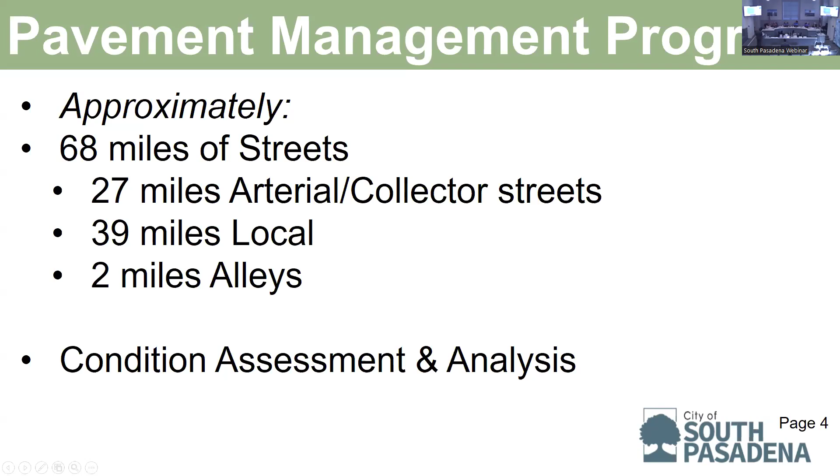Okay, let me jump to the next slide here. So this is really quickly just going through what we already showed you in previous meetings. These are the types of things our survey team went and took a look at. We basically had a sample set of every single street in the city. We had a team of surveyors following ASTM standards, looking at various conditions, and they have a metric to identify the severity and extent of these problems, then compile those to develop a grading structure for the entire street network.

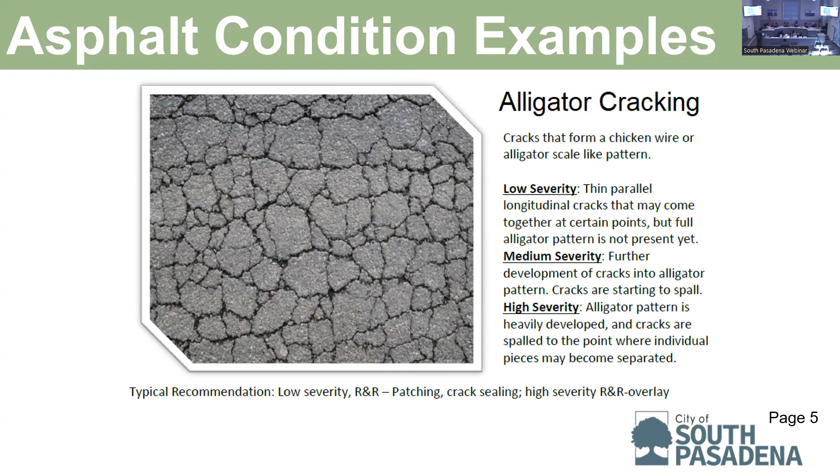So the types of issues they're looking for include things like alligator cracking, depressions, block cracking, potholes, obviously a very popular one here. You can see that the way they grade these potholes is by the diameter and the depth, and so the severity of a particular pothole can be rated, and that goes into the condition grading system.

Ted, I noticed you had some issues of subsidence of some of the streets. Is that also working on trying to fix whatever situation with the water that's causing the subsidence underneath? Yeah, that's correct. When it's related to a utility, we usually have some other indicator that lets us know that's a problem. If it's a sewer that's collapsed, we'll see the impacts of that, or a water break or things like that. A lot of times these are related to, say, a former water break that was repaired, but in our urgency to repair the water break, we weren't necessarily able to rebuild the foundation of the street. So the subsidence might be related to a previous utility issue. Yes, and that's why it's important, as you mentioned, as we do fix the streets, to actually fix the underground utility infrastructure at the same time.

Great, I'm glad to hear it wasn't a recent issue. Yeah, I mean, we have had some recent issues, but everything is patched up and still operating as of today.

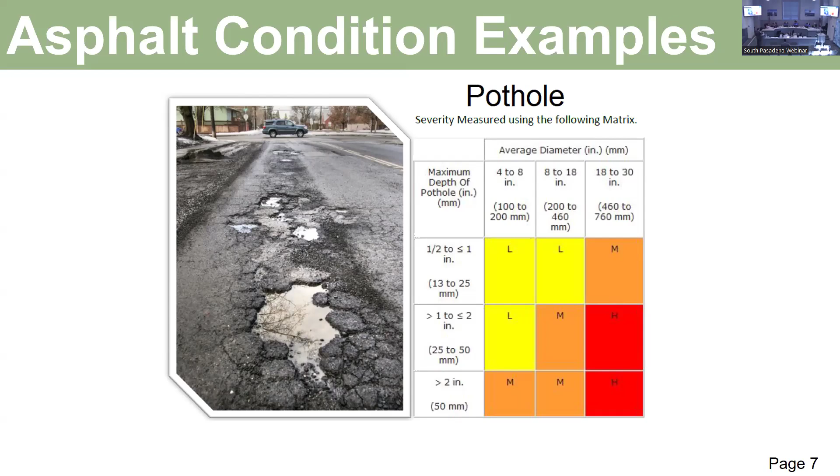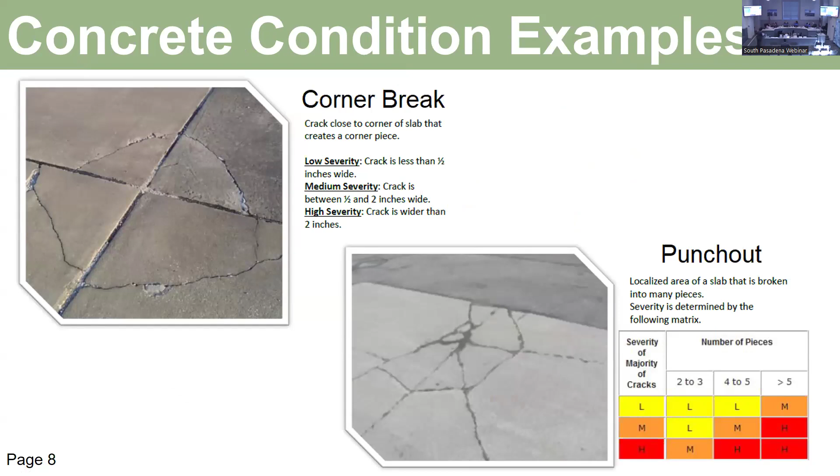So the majority of the surface of the streets in the city are asphalt, but we do have some concrete streets, and we'll talk about that in a little bit too. There's a separate set of condition factors we need to look at for concrete streets, basically looking at things like corner breaks, punch outs, divided slabs, spalling on the concrete, and these all factor into the condition rating system as well.

Ted, quick question. If tree roots are causing, let's say, lumps in a street, which of these categories would it fall under? It depends on what the condition is. A lot of the time it's creating some sort of cracking on the street because the tree roots are pushing up the asphalt. Sometimes we'll see if the tree roots are impacting the concrete curb and gutter. They don't necessarily have a grading for that because it's not the pavement, but that'll cause some sort of underlying issue that impacts the pavement itself. So it just depends on what the observed impact of the tree roots is. Okay, yeah, there isn't a tree root category—it's more like what happened to the asphalt condition as a result of the tree root.

That was one of the things I was thinking about when reviewing this—I'm thinking of a couple of streets in particular where the roots of the tree are creating ripples. In those cases where it's not split, right, the asphalt hasn't split, you're going to have a substandard driving condition, but neither of these metrics would specifically hit that because it's not open. Sure, so Glendon Way is a good example of this where the tree roots on that street—when we get a little further, you'll see the conditions get divided into a couple different categories. One category is based on loading, so repeated cyclic loading and impact from vehicles passing over it. That wouldn't be the tree root issue; it would probably fall into either a climate type of condition or some other type of condition. But yeah, it is factored in, it's just not specific to tree roots.

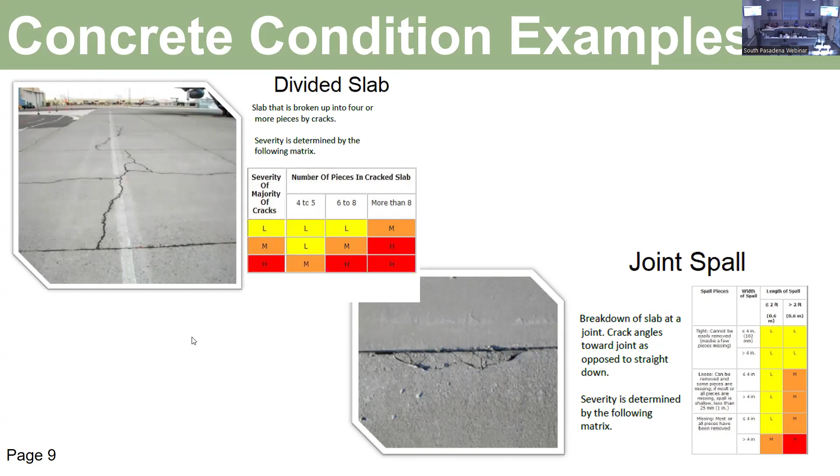And so this will probably jump right into that concept here. There isn't an obvious direct correlation between, say, a particular severity of a pothole, a size and dimension of a pothole, and a particular grading. In our previous discussions, we talked about our grading system, which goes from 0 to 100, 0 being the worst and 100 being the best.

The consultant that we use to do the surveying has a particular algorithm where they input the types of distresses, and the frequency and severity of them. They come up with 3 different PCIs, pavement condition indexes - one based on climate, one based on loading, and then kind of an other. They take those 3 factors and come up with an aggregate score, and that's what we're going to show you as the overall PCI.

But someone might ask, well, what score do I get if I have a pothole this big? It really depends on a number of other factors, so it's hard to determine that unless you go through the whole modeling process that our consultant went through. Hopefully that makes somewhat sense.

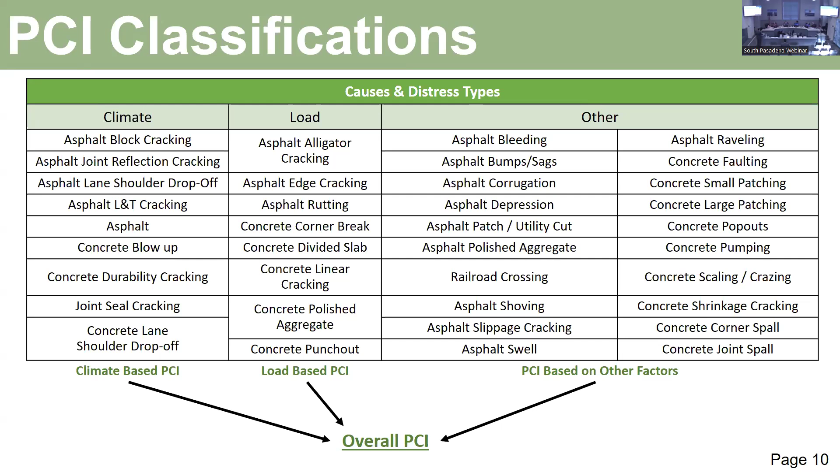So not too much different from this 2023 evaluation that we did. You can jump to the next slide, Raina.

Actually, before we do that - this was the 2020 map. If you look at the legend on the upper right, you can see the blue streets are in the best condition, mostly from newer, more recently done projects. For example, that middle section of Monterey Road that was recently paved a few years back is in blue. The orange section of Monterey Road on the very far west of the city was orange, in poor condition - that's the one we just recently repaved earlier this year. So this correlates to your experience driving on these streets. But the one thing to take away is that the red, very poor, is spread out throughout the city. There's no one region that's immune to poor streets.

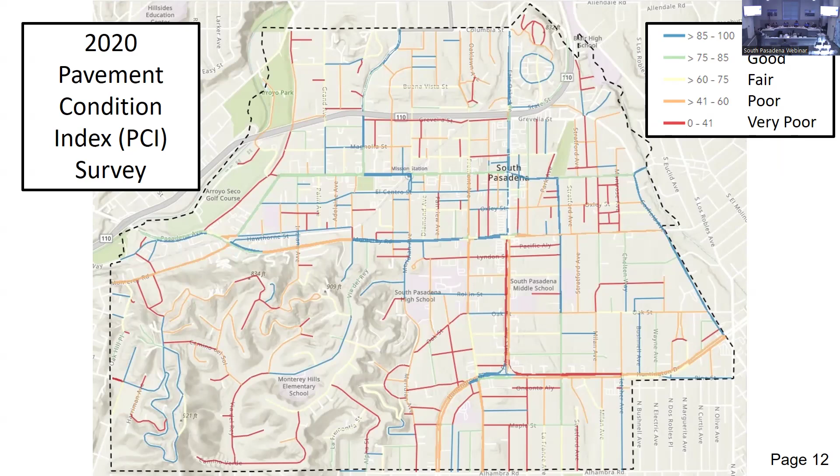Thanks, Raina. So let's take a look at the numbers from the 2023 evaluation. Next slide, Raina. Thank you. Sorry to make you jump around there.

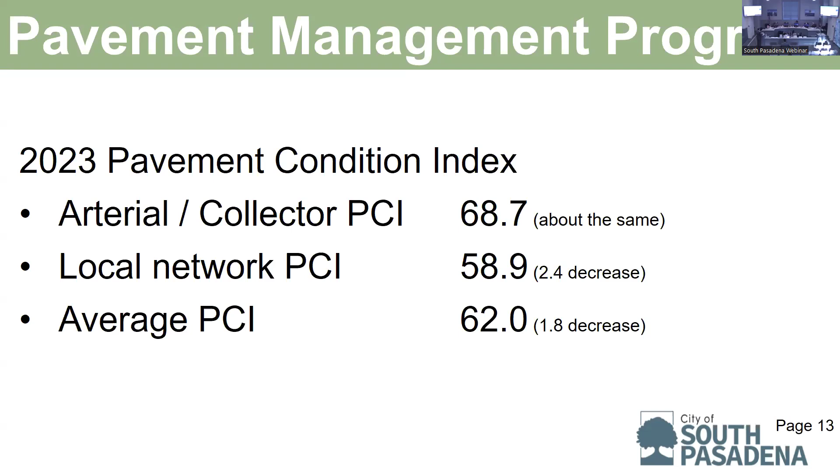You can see the numbers are pretty much the same - we have a small decrease. The local network, that's actually a typo, it should say 56.5, so it did go down 2.4. The average went down about 1.8. But again, this is all very high level. A 0.1, 0.5, even a whole point difference is kind of subjective because it's based on surveyors going out, identifying all these types of distresses, and then that all getting aggregated into this algorithm model. So there's not really a huge difference between the couple years. You wouldn't see it go up, but you don't see a huge decrease either, which is a good thing in most cases. Let's jump to the next slide.

And so this was the 2023 map. Again, red is pretty pervasive to the city, which explains our low aggregate index. There are some streets there that were since recently paved, so you have the remainder of Monterey. This survey actually ended at the end of 2023, so it didn't capture the new streets that were paved starting in January 2024. Okay, let's jump, Ted?

Yes, this survey was conducted in 2020, then you did one in 2023, and it looks like you did one in 2024 now. It was originally done - the last one on record is 2015, then it was done in 2020. Then we did the survey in 2023, but it took us the last 6 months to actually compile all the data, put all the information together, and get the maps together. I think we got the actual data around end of April 2024, but the measurement was done in 2023.

And that's important because, 6 months later now, the streets have continued to decay, so it doesn't exactly look like this anymore. Is that done by an outside vendor, or internally? Yes, we use an outside vendor, and all cities do this.

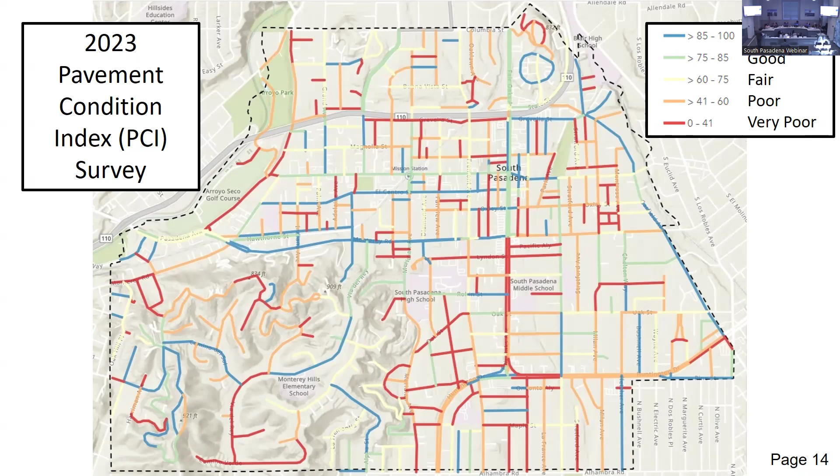Let me try it here. Perfect. Thank you. So this looks a little familiar to you.

This was the zone approach that we first introduced to you a few months back. The idea here, I'll repeat, was so that we could start a new maintenance program in the city in which we are maintaining streets on a zone basis, and we move away from the selection of picking streets all across the city.

Based on the previous map you saw, showing the severity and condition of streets, the same consultant would typically give a city a 5-year list. They'd pick the streets about to go bad and say you should maintain these before they get terrible, and pick the red streets and say you should rebuild these. That's kind of how our models worked over the years—those streets are sort of cherry-picked throughout the city. The zone approach we're proposing offers a lot of efficiency in terms of getting things done in an area versus hopping around.

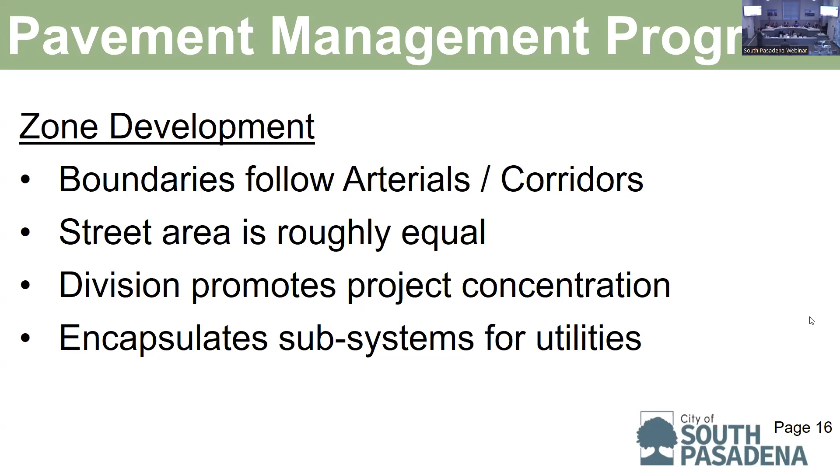If you're going to take anything away from this presentation, it doesn't really matter which area goes first in terms of the plan, because over time the idea is that you're maintaining streets in a given area in a given year. So people have some predictability in terms of when their streets are getting maintained, and the areas follow each other every year. In theory it should be like a 7-year program.

However, because of the dire condition of many of the streets, it'll take some time to get into this 7-year cycle program. So what we really want to do is address the worst areas first so that we can be more efficient and save some money. We'll talk about how that works in a moment.

But we did take a look at the PCI scores per zone. As I mentioned earlier, they're not too different—there's not a big difference between the orange zone and the pink zone, 57.2 and 57.9.

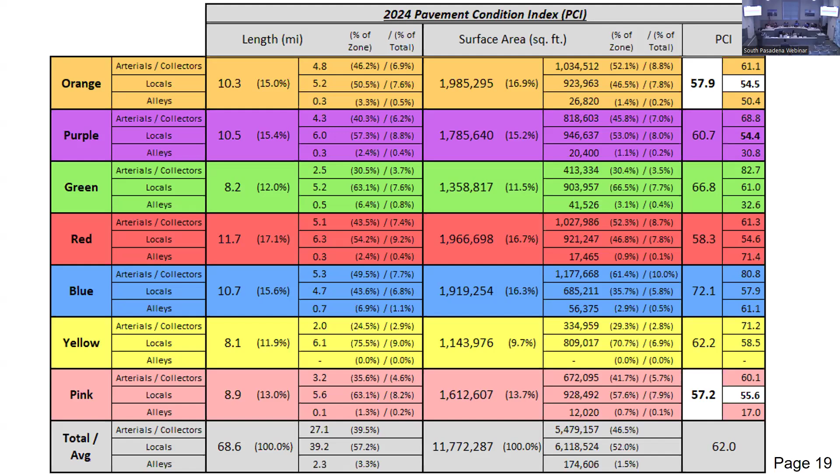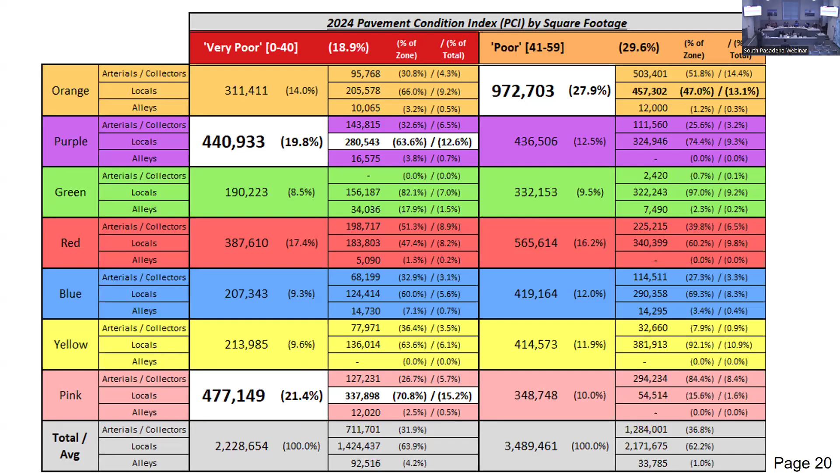So if we divide up the areas per the general condition, looking at the lowest types of condition here—at the top of the chart you'll see very poor and poor are the orange and red sections—we see again that the pink zone has the highest area of very poor condition, particularly in the local network, seconded by the purple area. Next up is orange with the largest area in the poor condition. Again, these are just high-level numbers to get a sense of the relative nature.

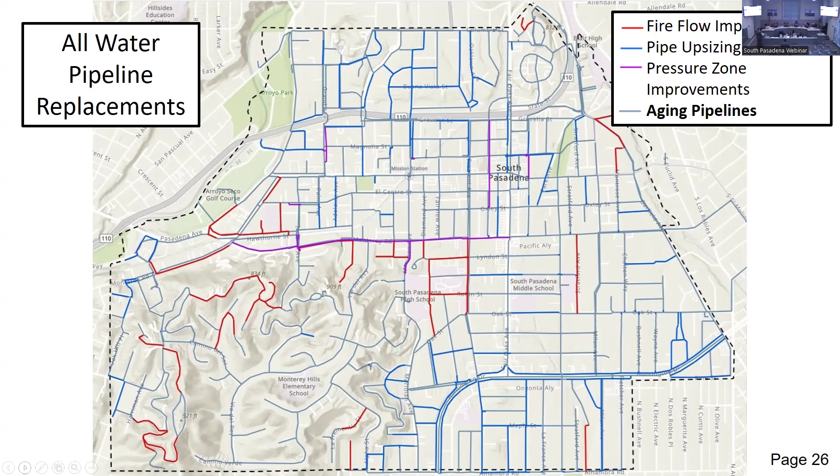So this is just one of the factors being considered. The sewer system is in a lot better shape because the majority of it has been lined. We do have issues with older manhole structures that need to be addressed, and we still have areas of the sewer system, mostly point repairs, that need to be excavated and replaced, some lining, and that would have to be coordinated with the street project as well.

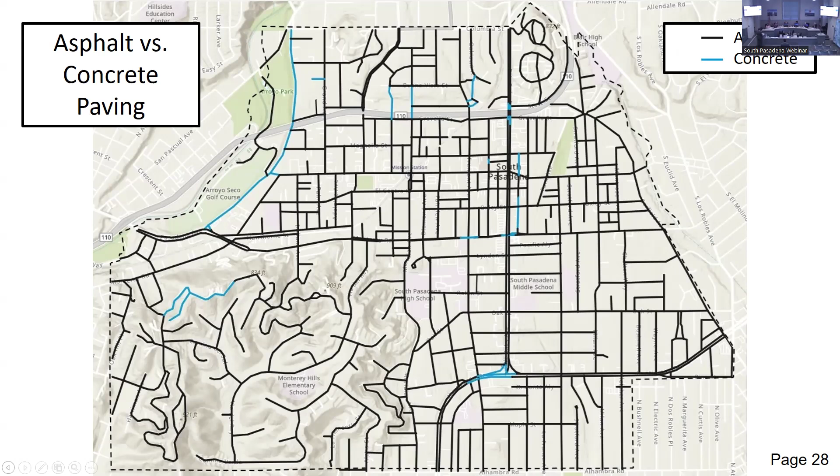Not necessarily, and that's a good point. For example, our proposal is that the intersection of Mission, Pasadena, and Arroyo, that little tiny section is currently concrete, and we would actually replace that with asphalt. That makes more sense for our needs. However, it could be very expensive to rip out a good mile of concrete to replace it with asphalt. It might make more economic sense to keep it and just repair it. It just depends on the circumstance, but it's a very good point.

So getting to the results of all this information, we utilized all this survey data and did quite an extensive analysis, both our team, our survey consultant, and then a separate streets program management consultant helping us prioritize where to focus our efforts on things that should be maintained now before they get into worse condition, where pavement has not yet failed, basically looking at every single street section of the entire 68 plus miles in the city and determining what we should do with it, then calculating the entire cost for that effort.

And that's what the council asked us to do. Many cities wouldn't go to this length—they would basically come up with a plan for the next 5 years and publish the list of what they're trying to accomplish. But we were requested to come up with a comprehensive plan for the entire city. Let's jump to the next slide.

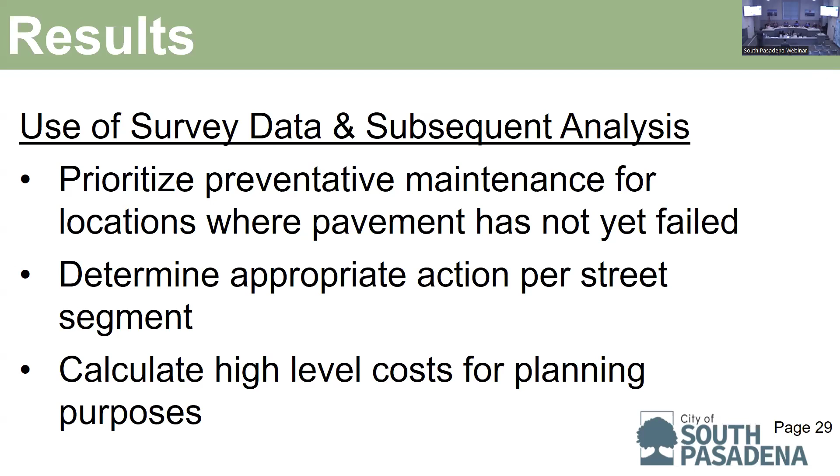Okay, so if you were to dive into the details of this, you would see from our consultant that they recommend all sorts of different things—different types of treatments and bonding, cape seals and slurry seals that they might recommend for preventive maintenance. For reconstruction, they would generally recommend that we grind off the top layer of the street and overlay a new layer, or we might have to replace the entire foundation of the street.

For your digestion and the council and the public—because this is really something we want to start providing information about regarding their street—we try to break it down into 2 categories. Either we need to reconstruct your street, which can be a grind and overlay or more in-depth construction, or we need to do preventative maintenance, which is simpler, faster, and keeps your street in decent condition until it has to be reconstructed. We tried to represent this on the next maps with blue meaning preventive maintenance, which we call treatment, and orange as reconstruction. In some maps you'll see orange as grind and overlay, and red as reconstruction. Generally we're talking about 2 categories: one cheaper and faster, one more costly and effortful. Let's jump to the next slide.

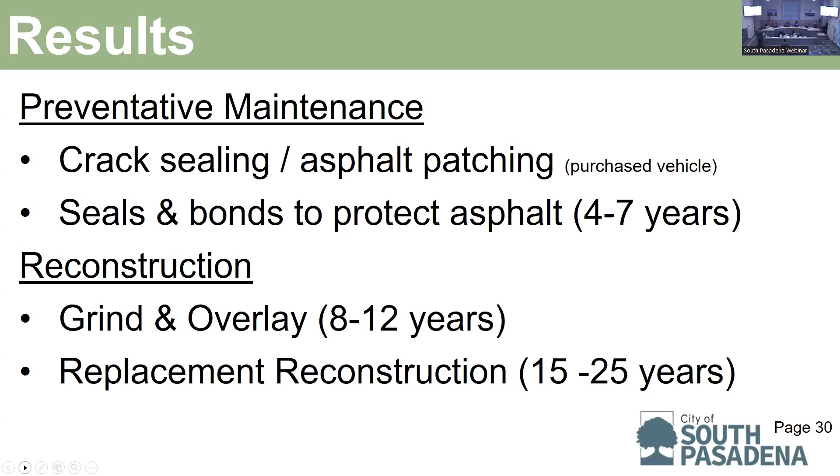So we did come up with a cost model for the whole thing. As I mentioned, our consultant looked at different methods for reconstruction, ranging from 65 cents a square foot up to almost $23 a square foot for concrete. We added costs on top of this for our staff administration and project management, anywhere between 7% to 30%, depending on the type of work needed and the type of street.

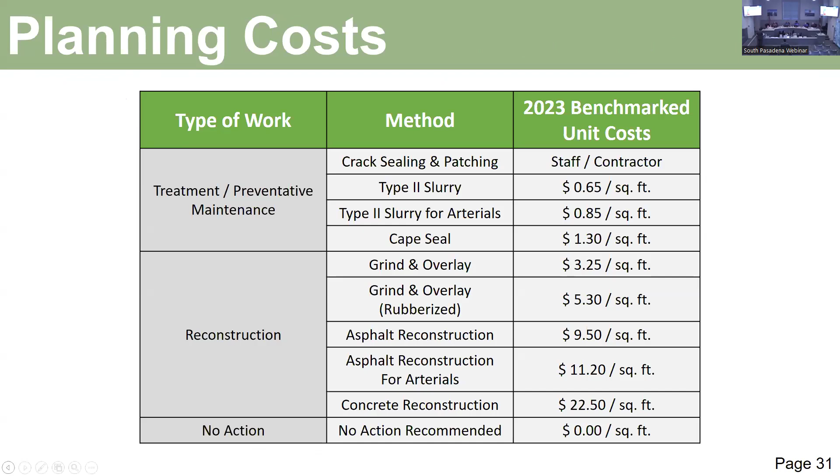So basically pulling all this information together, let's jump to the next slide. Well, before we get there, let me make one more comment. What we're trying to accomplish here is a long-term maintenance plan on the zone approach.

Ideally, if we get to a point where we've repaired streets and we're just maintaining them, our costs will go down quite substantially over time. This is a decay curve, used a lot in engineering for all types of applications, not just streets. A street that's in great condition, brand new, will stay in decent condition for most of its life, then towards the end of its life, it will drop off in quality very quickly.

So the idea here, cost-wise, is to catch those streets before they have that drop off. You can inject a little bit of money to keep that condition up versus paying a lot of money to rebuild it from the bottom up.

You can't do this forever. In fact, if you notice the nuance of those curves at the top, each cycle of an improvement drops a little further and a little further. So eventually you do have to rebuild a street, but the longer you can keep it in that up cycle, the less money it's going to cost you over time. That's kind of what we're trying to accomplish here.

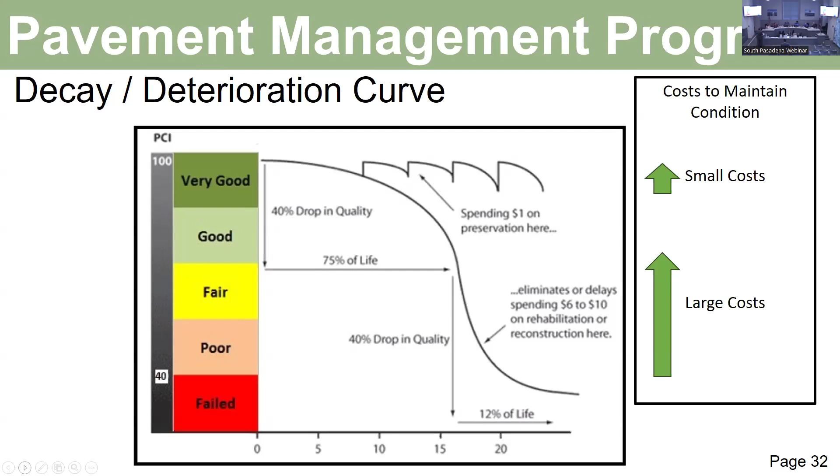So really it comes down to 2 parallel efforts: the blue areas, keeping them maintained and in good condition, and the orange areas, a little bit of red in there, rebuilding those and then getting them into a blue sort of maintenance cycle. Not to be confused with the color of the zones, we're using a lot of colors here, so please bear with us. But let's jump to the next slide.

As the chair had mentioned, when we're figuring all this out, we have a lot of factors to balance. The community quality of life and their expectations is a big one. We have people who have been waiting for streets to be repaved for many decades, which impacts their quality of life. We have the future deterioration of streets, and that has a repair cost escalation.

The longer we wait, the more those streets deteriorate and the more they're going to cost. We have construction costs increasing every day, so if we're going to defer projects, we're going to feel the impact of those costs. We have to consider where to put our money: do we put it on arterial streets, which are used not just by residents but the grander public who use our city and commute through it, versus local streets?

We're trying to focus on a local program. Alleys also get considered too—we have a lot of alleys that are in very poor shape, but they don't get a whole lot of use. Safety and claims come into consideration here with the litigation we face when streets are in poor condition. Utility infrastructure needs, other transportation improvements, and safety improvements in particular that we need to make on streets. And then the reduction of waste.

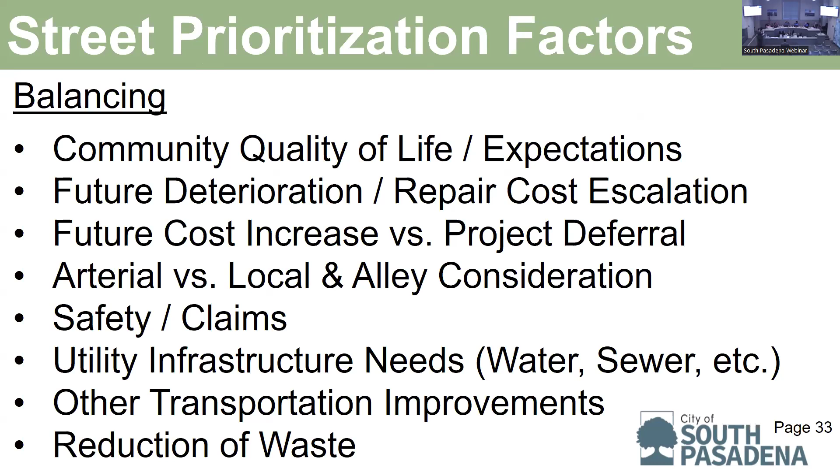That's really going back to our slide with the decay curve—how do we implement a program that spends the least amount of money to get the most benefit? So basically we laid out all of these factors, all of these costs, all of this condition data, and we laid out a 15-year program to repair the streets in the city. This is how we built out the 24 projects in that program, considering all these factors.

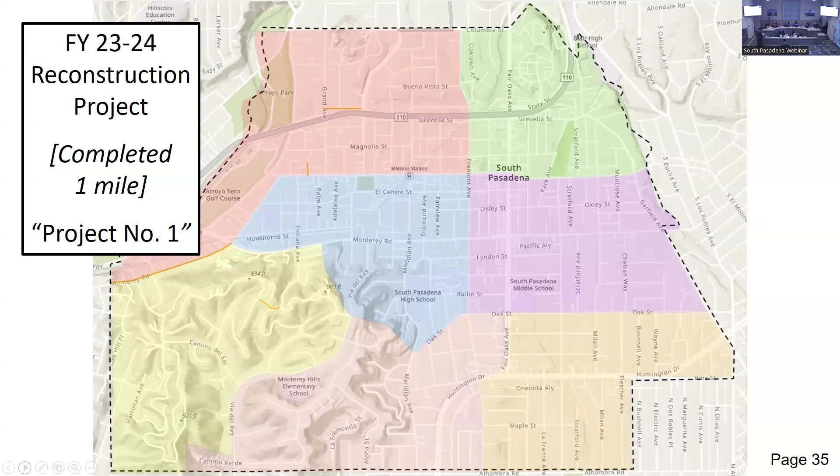Starting with the project we just completed, we're considering this project number 1: Monterey, Alta Vista, Forest, and Sterling. Basically we've taken these streets, shown orange here because we reconstructed them, and they're now in new condition. So project 1 is completed. Let's look at project 2—that's the street I just mentioned to you that's in design and will be built next year.

And again, this was the older approach of sort of tagging streets throughout the city based on their condition. So we're going to complete that project, and those are the streets represented there, including water and sewer improvements.

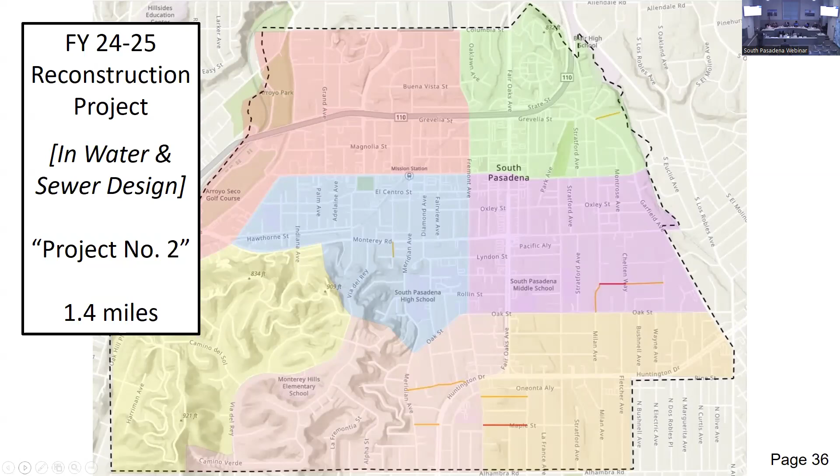I'm jumping to project 4 because I want to talk a little more about project 3. This is the project that Commissioner Jones, we were just talking about, at Arroyo, Pasadena, and Mission. What I should mention about this project is it's very small, about one-tenth of a mile. But as we mentioned in our previous meeting, this is going to cost us about $1 million or so. The reason it's going to cost that much money is because we're making all sorts of other pedestrian improvements, because this is kind of a gateway to the Arroyo Park area.

We want to improve the bike lane and pedestrian access, so we're not considering that full cost in the model. The reason is because we're getting special transportation funds to apply to those improvements. Our model should really just focus on the engineering and construction costs for pavement improvements. So in our model, this might cost $200,000 to $300,000 to repave, but in reality it costs about $1 million because of all those other improvements. That's important to consider when we're looking at it. We'll show you that in the cost model in a few minutes.

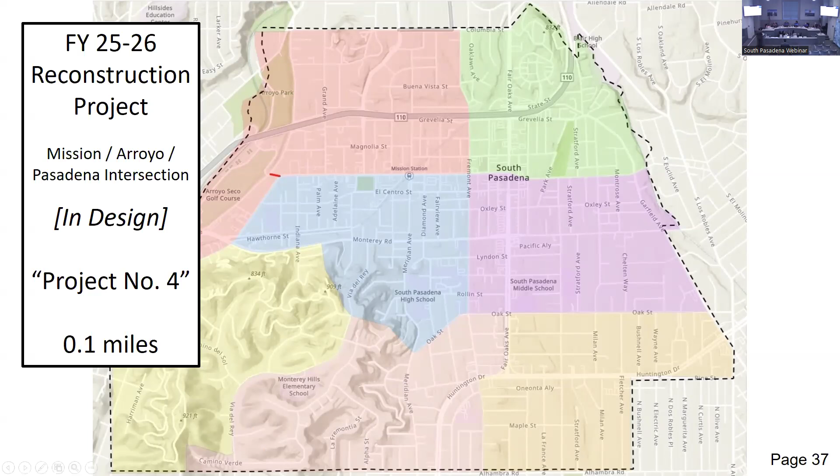Okay, so if we were to take everything, considering all the data we just looked at, this is what our consultant shows us our high-level needs are. The blue areas are things that should be maintained, the orange areas are things that should be grinded and overlaid, and the red areas are reconstruction. Now this is really high level—there might be some orange in here that could be blue, which is good news, right? We thought it needed reconstruction, but it just needs a treatment. There could be some blue in here that should be orange or red, and that's bad news. We figure this out as we go project by project and get into the design process, but this is how we developed what we think needs to happen in this city.

Any questions so far on this?

So we're talking about the street. We're talking about curbs and gutters, roots of trees, the overgrowth of trees into the street, and where there isn't a sidewalk. That's right.

Yes, let me add a couple considerations to that. The consultant's costing analysis didn't include some of those things. However, the percentages that we added on to the costs that you'll see in the model do. For example, it's hard to look at a particular street and say our surveyor wasn't able to validate the condition of the curb along the entire street. But if we know that a street needs to be rebuilt, we can estimate a certain percentage of that curb is going to have to be rebuilt too. So we added a percentage to deal with that.

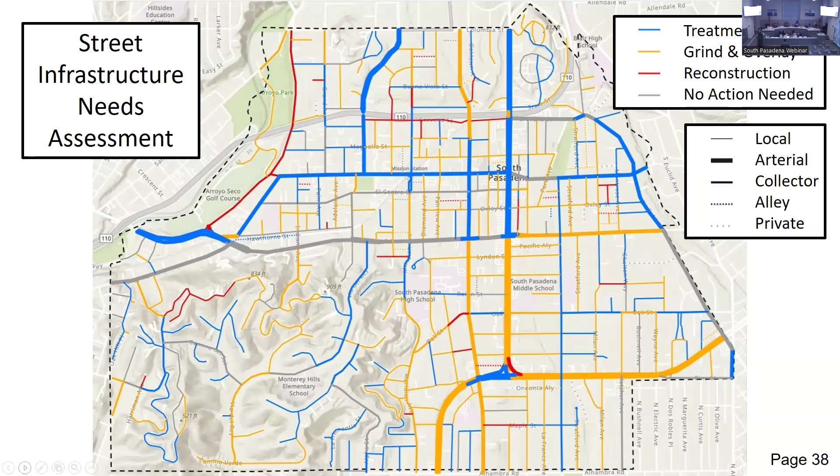Okay, so let's jump to the next slide. So again, some more colorful charts here. This is showing us how much money overall we're looking at because of all these issues. In general, you're looking at a high level estimate of about $43 million to consider everything in this city, and that's in 2023 dollars.

When we're looking at these types of models, we're not going to do $43 million of work in one year, but you want to look at it in a single year of cost so that you can compare future years. When you actually budget for it, you have to consider inflation and cost increases. But when you're doing a comprehensive plan, you want to look at it in a single year so you can do that comparative work, so in 2023 dollars.

When you did this assessment in 2020, what was the estimated cost at that time? So the city's never done this assessment before. Okay, got it. Yeah, perfect. And I'm glad you mentioned that, because in the past they've just done these 5-year assessments where they looked at what they can accomplish in 5 years.

What is your estimated escalation on an annual basis if we were going to look at this number in 2026? What would you anticipate the cost to be? Sure, we do go over that in a little bit, but all things being equal with the way CPI increases every few years, we're looking at probably about 4% to 5% a year. We've seen, especially through COVID, 7%. But recently I think we're looking at 3.9% for this past year, so I think that's a decent estimate, maybe closer to 6. But we go over that in a few minutes here too.

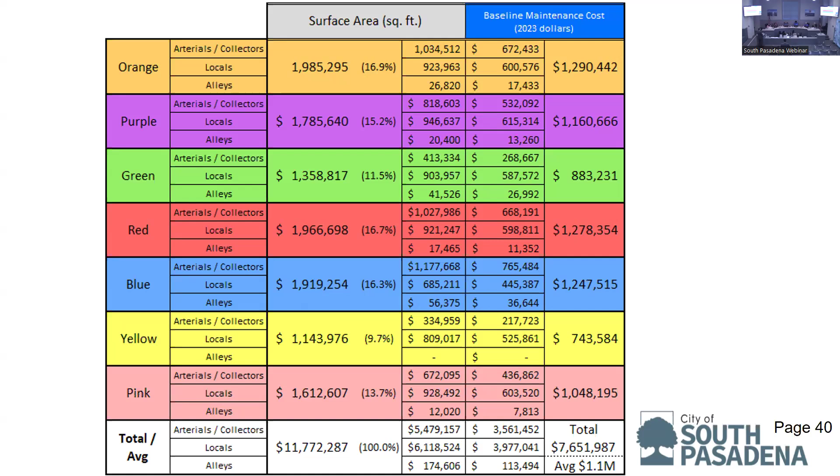All right, sorry, just one conceptual question. The preventive maintenance, you've got a 4 to 7 year lifetime predicted. I feel like maybe you'll be chasing the treatment the whole time—like if we're only doing one zone every 7 years, and some of this stuff has only got a life of 4 years.

Well, we put 4 to 7 years because, let me put it this way—on this initial pass, we're going to try to push the treatment as much as possible. So there are streets that probably could use a reconstruction, but if they will accept a treatment and we save money, we'll apply a treatment. In other words, they're probably at the bottom of the barrel as far as treatment goes. Now, if we rebuild a street and properly maintain it, we're looking at 7 years, or it could even be better if we continually keep water from intruding the street and cracks from forming. So that 4 to 7 is a number we have to give to the state to show what the life of those streets we're about to do will be. But in reality, if the program's done correctly, you can really extend those life cycles.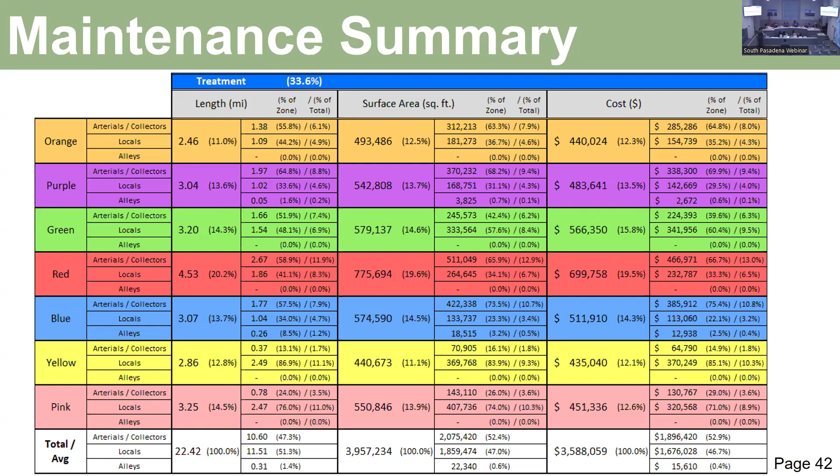Okay, so let's jump to the next slide. Here is our project 3. You can see here, this is sort of the buried lead, that after looking at all those numbers, we need to start somewhere and we need to start maintenance projects right away. In an ideal world we're doing these at each zone, but what we'd like to do is bite off as much as we can chew as soon as possible with treatment projects.

So what we're looking at is the purple, orange, and pink zones this calendar year for treatment projects. Now, like I said, we're trying to push this a little bit more. We could probably add in a few more streets, which our team is looking at right now, to get them into the blue category. But this is what we are planning to do, and this is what we had to submit to the state before July 1 to get funding for this current fiscal year.

Does this kind of make sense, culminating all this information? And Chair, I didn't forget about your question—we're going to tag that in when we talk about reconstruction projects. I think a great idea is to go through the rest of the slides, because I think there's going to be a ton of questions. Yeah, of course, let's do that. We'll shoot through it. Because I think you got some great questions and I liked your questions.

So as far as we're concerned, we're just going to go through the project. Marengo is also in this zone. Now, the reason we don't want to do Marengo this calendar year but next year is because we're finalizing another study on Marengo so we can make some improvements to the striping plan, the painting and markings on Marengo. We feel like we can have that ready for next year. This is more of a transportation type issue, but as we do these blue streets, we have to repaint them, and if there's an opportunity to improve the painting pattern, we will do that.

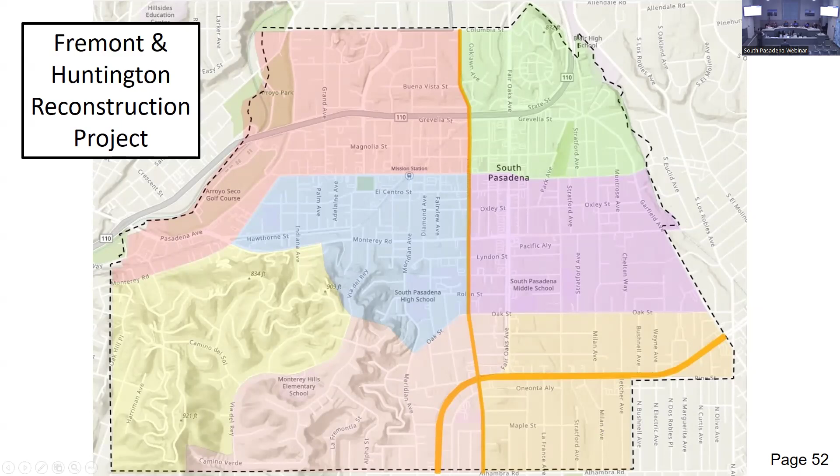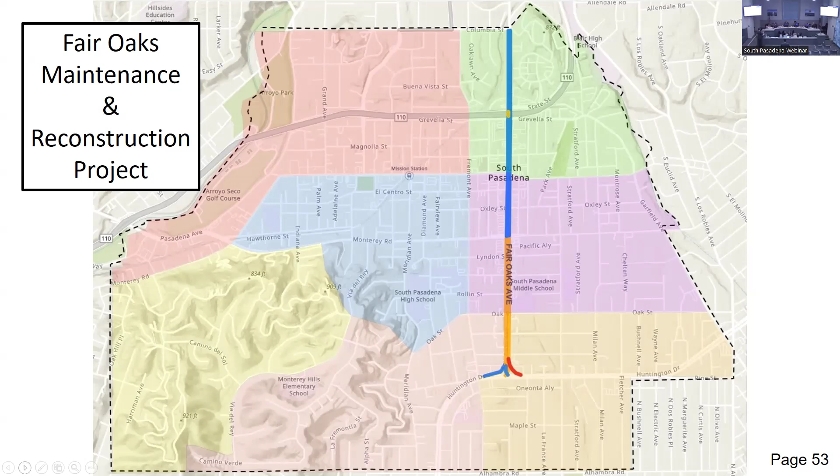So really we're just organizing the projects in the same way because of this—if you could just go through, Raina. So we have a project on Fair Oaks. We have funding for some of this project right now, and we need additional funding, but Fair Oaks is a separate effort, similar to Fremont Huntington. Let's keep going.

Okay, so we talked about arterial projects there. Now we're talking about the reconstruction efforts per zone. Here's the remainder of your $43 million.

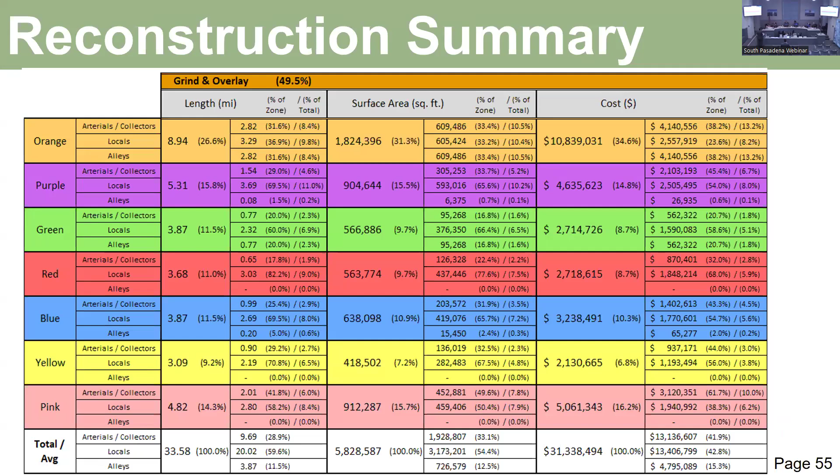Grind and overlay here you could see is 31 million across the zones. And then go to the next slide, you could see the real reconstruction work, another 12.5 million. And so that encapsulates the whole 43. So really this is simple.

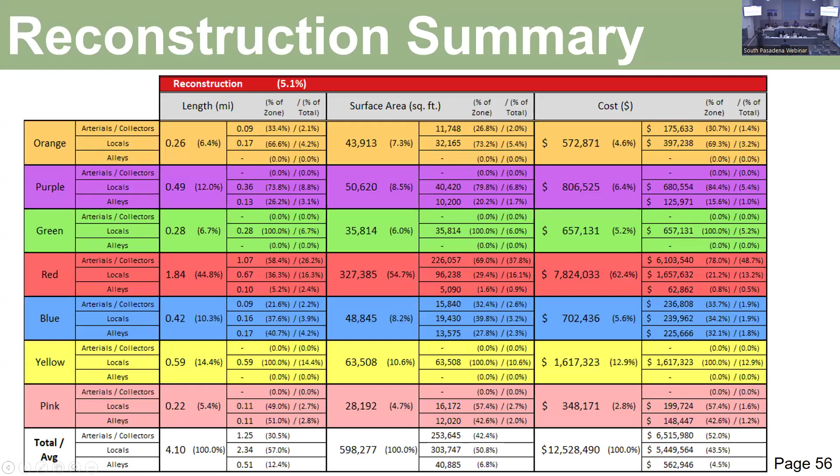Let's keep going, Raina. We're gonna go zone by zone and implement these projects. Now, I think we might have skipped a slide or two because I want to address the chair's comment about utilization. So for example, if you jump back a little bit, there should be - let's go a little farther, one more. Okay, no, I think it's at the end. We'll keep going, sorry.

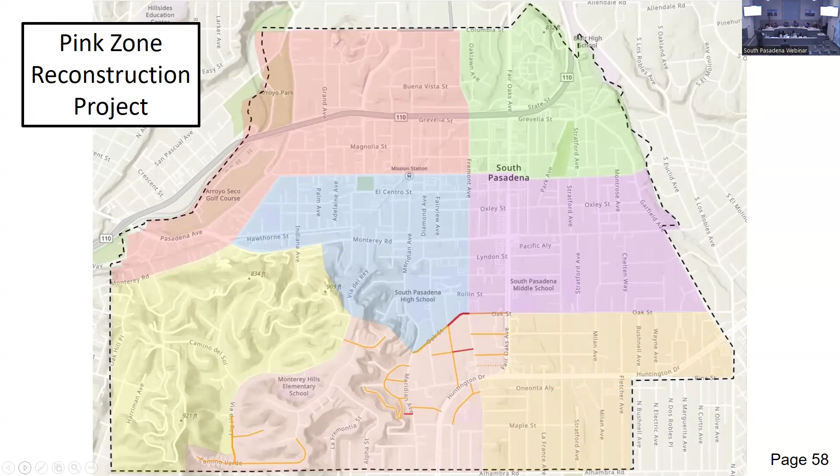So the idea here is to go through these zones and do this reconstruction effort. It's a big bite off to get through these, right? But streets aren't getting better. We actually have to address these sooner than later, and it's going to cost more the longer we wait. So we're really just organizing these projects. You just jump through these, Raina, zone by zone, over the coming years. You can keep going, by prioritization. Let's keep going.

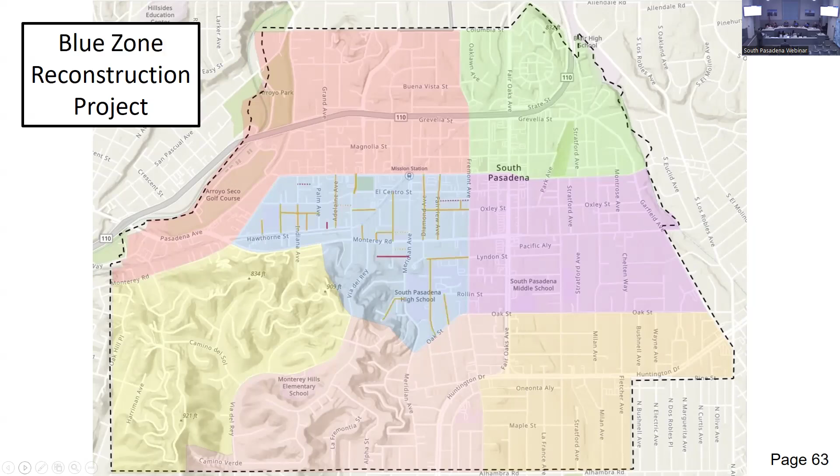Let's hit blue and then, or green and blue. Okay, okay, let's jump to the next section here.

Okay, so now the last special section are these sort of unique projects to address the chair's comment about areas that need to be sort of broken off for either earlier addressing or later addressing based on many different factors. So one good example of this is Indiana Avenue.

So Indiana Avenue serves as a collector, but also a residential street. It's sort of like the gateway to the hillside. And then there's a small section of Pasadena Avenue that's in pretty rough shape that's heavily utilized. It's right by the train tracks. So, for these factors, and considering all these things together, we've broken off special projects that need to be addressed in this way. So this is one of them. Jump to the next one.

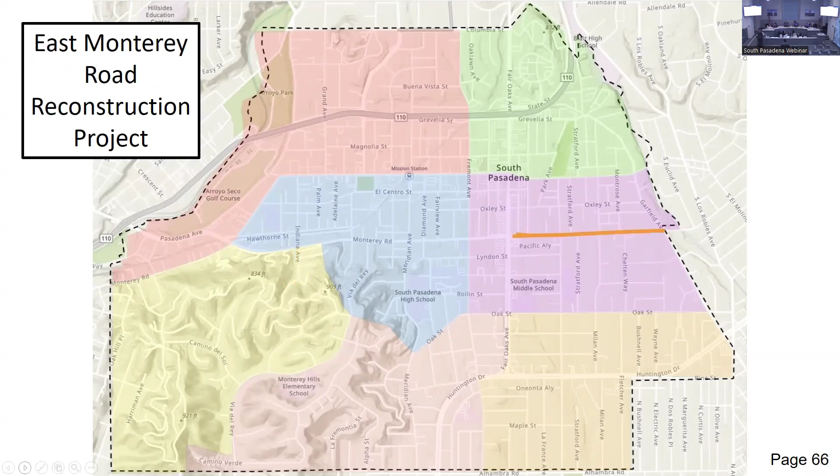Monterey is another one. Let's go to another one here. Meridian is really a special type of street for many reasons, the concentration of schools and other organizations and things like that.

Let's keep jumping here. And then we mentioned Arroyo, and Arroyo is really kind of an unfortunate case because it's just so expensive to repair that our consultant might even say that because of that, you put it first. But we're actually putting it towards the end of the schedule because of that. The condition of it is in poorer shape, and it's not declining fast like some of these other streets, and it is a hefty expense because of the concrete infrastructure. So there's Arroyo. So, okay.

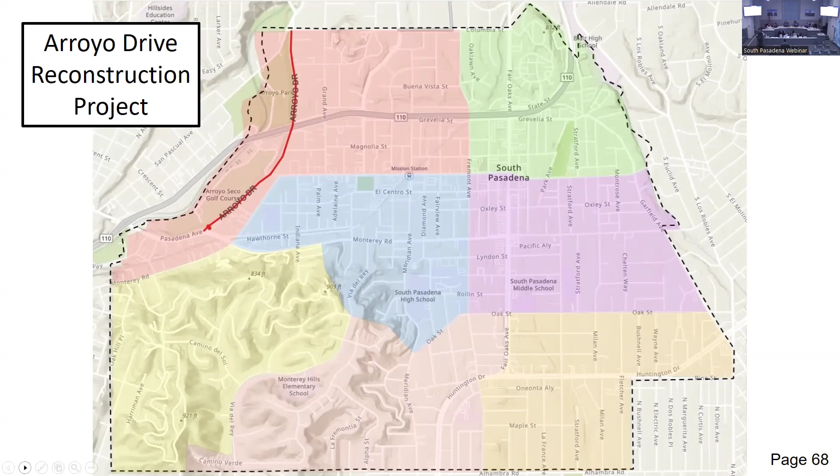The entire network, this is just showing you what this looks like if we were to map out these colors from the zone approach. The idea here is that we provide some sort of map for the residents to see how this is going to progress over time, where they can click on their zone and see what's happening. So this is an initial idea of this. Let's keep jumping here. Okay, now we're at the end.

We need to start the design on these years in advance so that when every July 1 comes and we get our state funding, we can start building right away. In the past, we would ask council for an appropriation in June, and then we would start the whole process in July, without really a consideration that the project was going to take many years to actually build. So what we would like to do now is actually initiate a lot of this design work now so that these projects are ready to build in these cascading years coming forward.

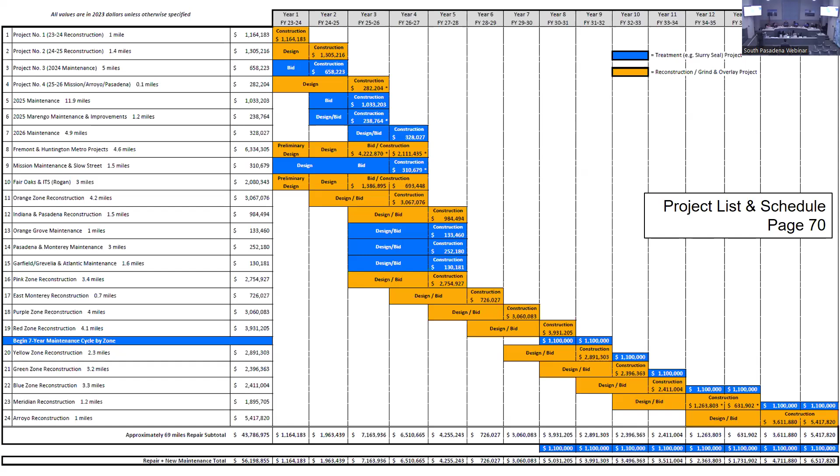Now that deficit is about $8 million. So let me break this down for you. If the city is able to contribute $1.4 million each year from the general fund to streets so that we can get that $600,000 from the state, that gives us about $2 million contribution. We take a little bit of these other transportation funding sources that we're eligible for and we apply them. We can contribute a good $2+ million per year to streets. That would be $30 million in today's dollars over time.

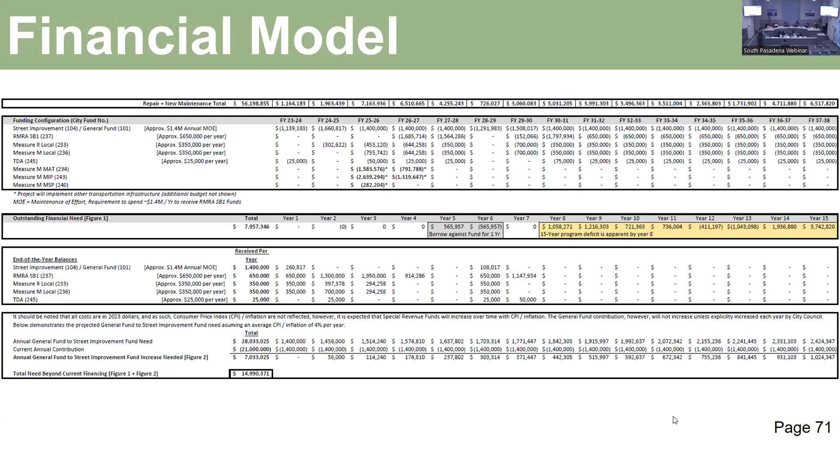All right, questions? So, question. We're 56 million to do the street improvement program. So if I gave you $56 million right now, how long would it take to get that completed? So it would take 15 years. Regardless, if I give you the money right now.

Well, so I mean, the money is one thing, right? But just the project delivery, the resources, the design efforts. Totally get that, so that's why we mapped that. Even a 15-year schedule, and I know when we took this to council, we were expecting some of the council members to even be like, well, let's make it 8, let's make it 5. No, I get it, even 15 years is pretty aggressive.

Perfect. Yeah. So we've had other presentations from you about our water system and the replacement of the water system. What's that number again if we were to do that? Sorry to put you on the spot. No problem. So the 30-year need for our water system has been modeled at $180 million. That includes reservoirs, pipelines, and other things too.

Okay. The sewer system, does that encompass the sewer system? Yeah, 30 years sewer system, we're looking at about $15 million is what the model looks like. You could see there wasn't a whole lot of work on the sewer system, but it's still a substantial amount. And from that presentation before, to get that done, and the presentation that you have here, what you have been sharing and illustrating in both presentations is, hey, there are certain programs that we are able to get the funding to do this through the state or the federal government, and we do that. However, with regards to this presentation, there will be a deficit, and if I'm looking at it, the total requirement beyond current financing is you need around $15 million. Is that what I'm seeing, total need beyond current financing? That's 14.9, you know, all things being equal. That's us just basically projecting out what's missing as we progress through the timeline, in 2023 dollars.